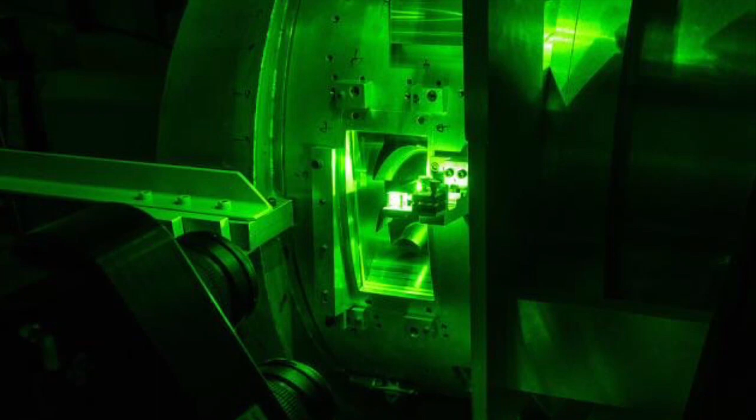I'm Nick Daggett, the propulsion engineer. At the University of Bath, the ELA, or Electric Light Aircraft team, have been designing solutions for the future of air travel since 2016. Some of our previous contributions have included an all-electric commuter aircraft with 9 seats, developing a strategy for generative design for additive manufacture, and volumetric analysis of propulsion unit egress mainstream interactions to improve efficiency.

In everything we do, sustainability comes first. Our entry into the Sustainable Aviation competition takes a deep look into the future for aerospace vehicles, theorising how we can achieve zero-emission flight within the next decade. This is the future of propulsion.

The aviation industry is increasingly becoming a leading contributor to global warming. Whilst other sectors such as energy, farming and manufacturing are making steps to reduce their greenhouse gas emissions, air travel is currently lagging behind. The industry has set targets to achieve net zero emissions by 2050, but currently it is some way from accomplishing this.

In the last 5 years, battery electric vehicles have emerged as the focus of aviation's attempt to decarbonise. Rolls-Royce and Airbus have exhibited plans for their regional eFan-X in 2017, but this was later scrapped. Meanwhile, others have attempted to design larger electric aircraft or have made proposals for electrification of urban air mobility. But as of today, no electric aircraft operate commercially.

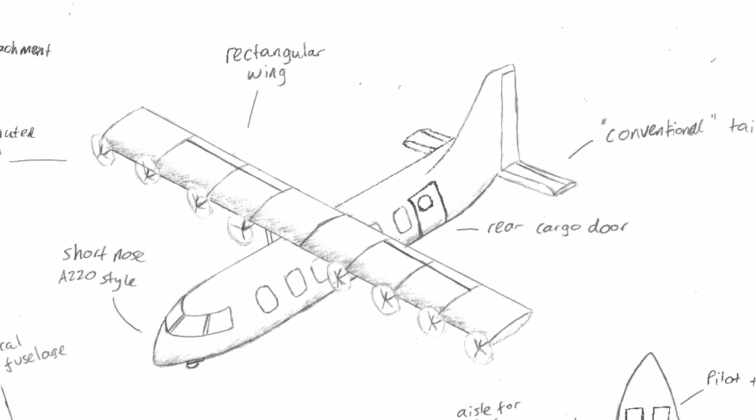As we have found in some of our previous design work, whilst all electric aircraft can operate with zero emissions, their low energy density because of the batteries compared to traditional aircraft fuel means that they are inherently heavy, which severely limits the range that they can achieve. But what if the requirements to incorporate a heavy battery into aircraft could be mitigated by making other parts of the aircraft lighter? Individually, we have developed some concept ideas for methods which may be able to achieve this.

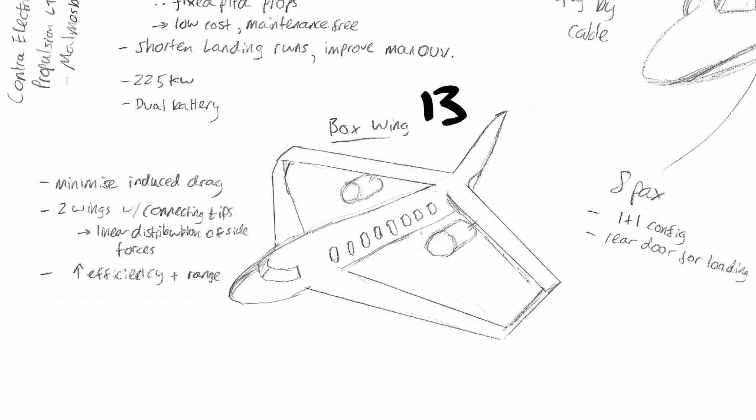While ideas such as lighter structural materials and more power-dense propulsion units are actively being considered by the industry today, our concepts envisioned a future where increasing the efficiency of the airframe would radically reduce the weight of the aircraft. Traditional tube and wing aircraft such as the Airbus A320 exhibit a maximum lift-to-drag ratio of around 18.

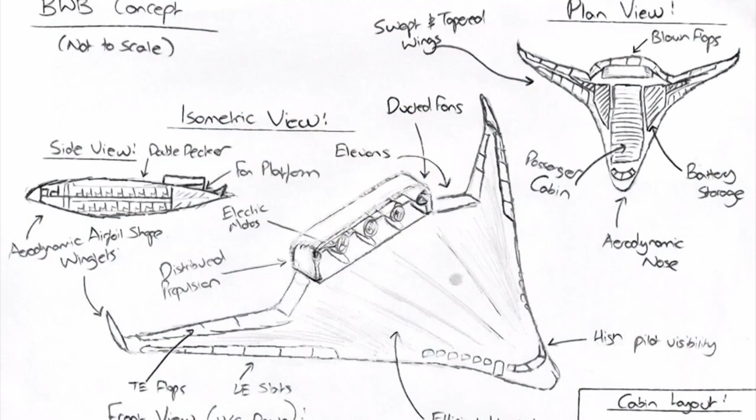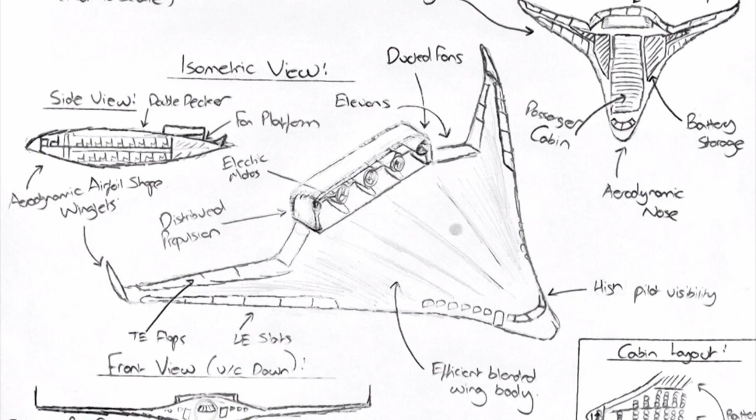Our most aerodynamically efficient concept, a blended wing body aircraft or BWB, would exhibit a lift-to-drag ratio of up to 25. Therefore, a BWB would provide a greater lifting capacity than similar-sized tube and wing aircraft, which could be used to carry a larger battery pack. This is the concept we decided to take forward.

During concept selection, we also disregarded ideas based on more radical zero-emission solutions like hydrogen or lighter-than-air technology, since the groundwork for battery electric flight has already been laid by the automotive industry and aerospace players in the last 5 years. We believe battery power is the future of propulsion.

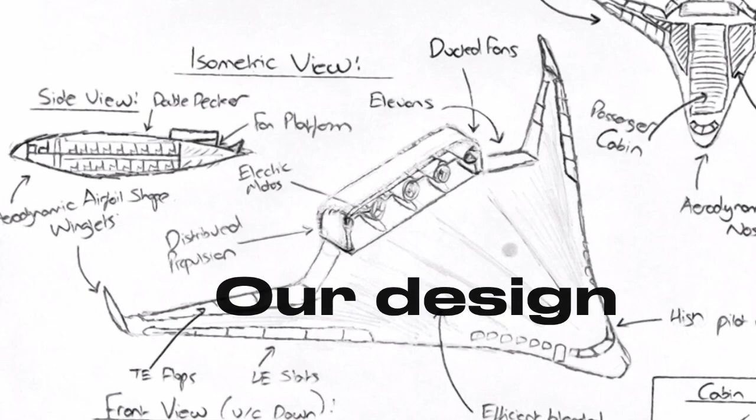From the concept designs, we decided to use distributed ducted fans for their high propulsive efficiency and effectiveness when integrated with a blended wing body design. This is due to their ability to provide a blown elevon effect, where the ducted fans act to re-energize the boundary layer at the elevons and enable greater aerodynamic performance.

This allows higher angles of attack before reaching the stall condition of the aerofoil, thus allowing for short takeoff and landing capability. To materialize the concepts into a CAD model, I used SolidWorks xDesign.

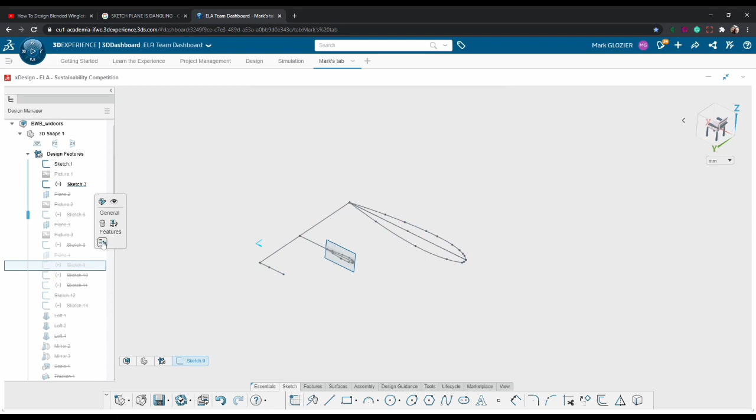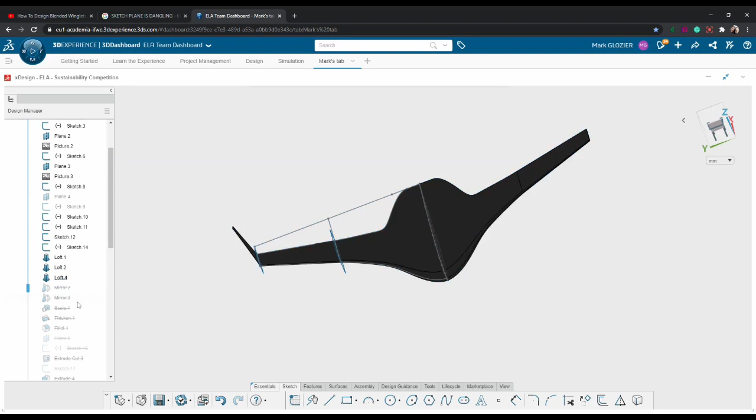I started by sketching the overall plan profile of the BWB and sketching aerofoil profiles to fit within this. NACA 23012 aerofoils were chosen from research as a suitable section for the BWB. The profile was imported into X-Design as an image and sketched over as a spline profile. These profiles were lofted with guide curves from the plan view to form the BWB and wingtips.

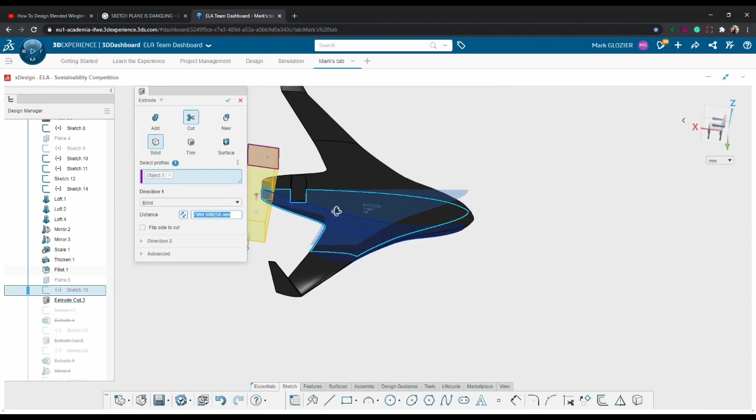The mounts for the ducted fans were then modelled through an extrusion and the fans assembled accordingly. Elevons were then modelled and assembled into the model upon performing extrusion cuts and modelling the shafts. The ducted fans themselves were modelled in xDesign and assembled within the ducted fan unit within CATIA.

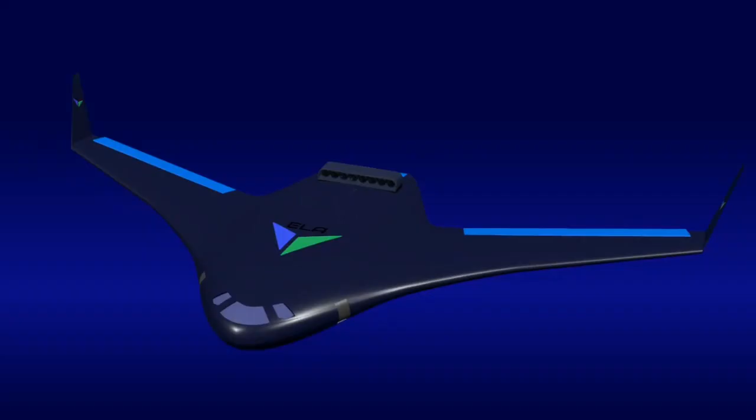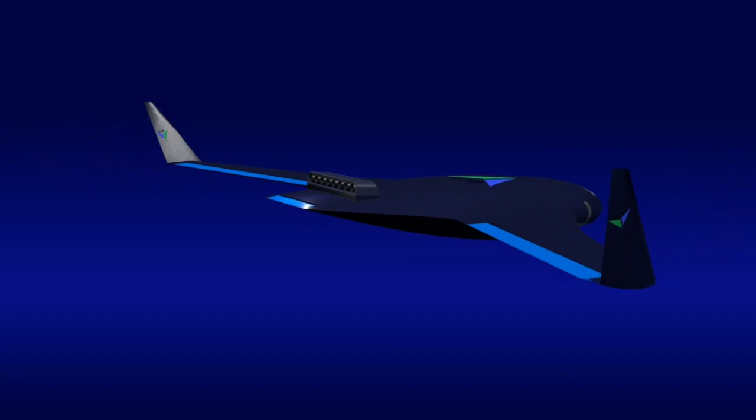This is our final aircraft design, featuring a frontal passenger cabin, ducted fans, winglets and elevons. We created this render on the 3D Experience platform in CATIA Live Rendering, setting up lights and a camera path, and using it to add the ELA decal.

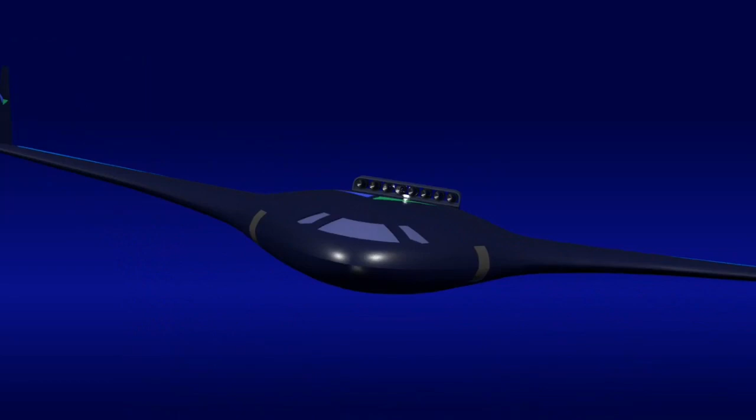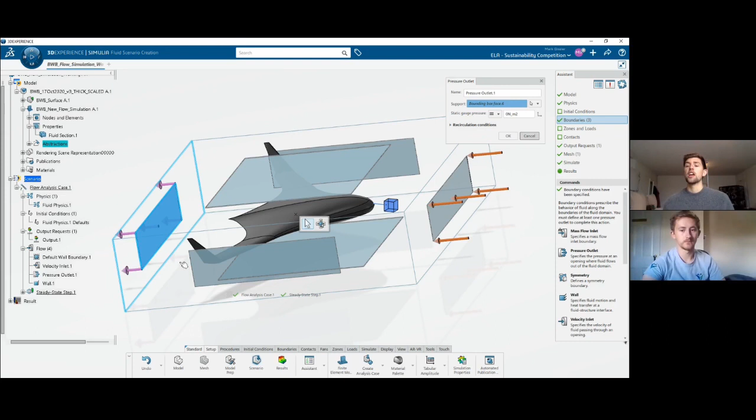The next step was to subject our designs to some validation simulations. We wanted to simulate the flow of fluid over the blended wing body to show off the efficiency of the body. The first step was to import the model and assign the fluid region, which we did by creating a bounding box where the fluid would be and assigning the model as the fluid cavity. Then we assigned our boundary and initial conditions: an inlet velocity condition, an outlet zero pressure condition, and the walls of the bounding box as the simulation walls with a slip condition.

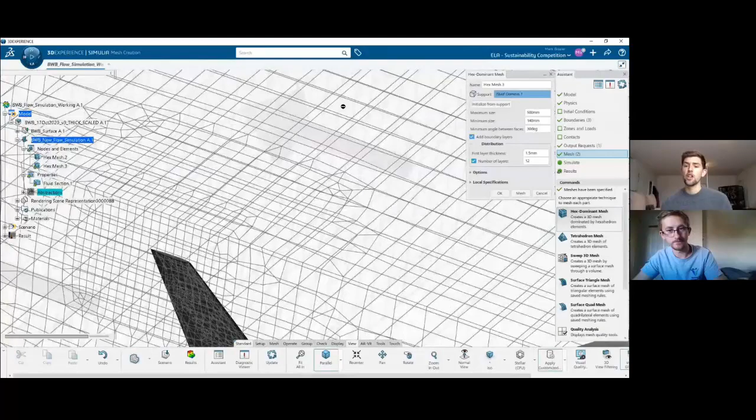The next step was to assign the fluid as air and create our output requests, so the simulation would record the data we later wanted to use to create plots and figures. Before we could run an accurate simulation, we had to create a refined mesh. We did this using the hex dominant mesh settings within Simulia, and also using boundary layer conditions to ensure refined mesh at the edges to show the change in the boundary layer state.

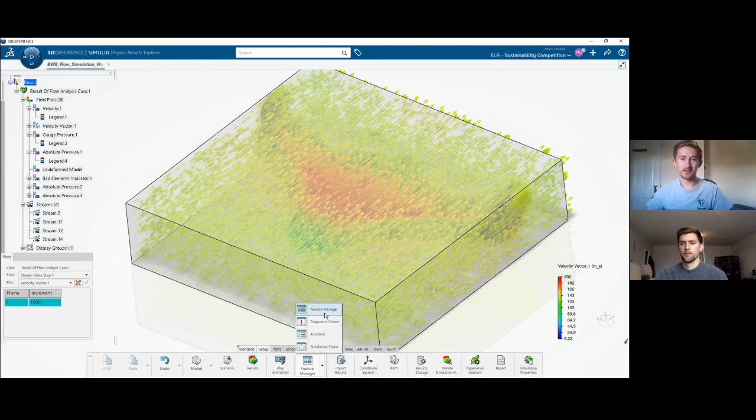We obtained the velocity fields from the CFD simulations and analysed the flow field around the blended wing body at different sections across the wing. By changing the domain to the blended wing body surface, we were able to obtain the general absolute pressure field across the surface. We analysed pressure contours at different spans across the blended wing body and extracted numerical values for the pressure across the aerofoil.

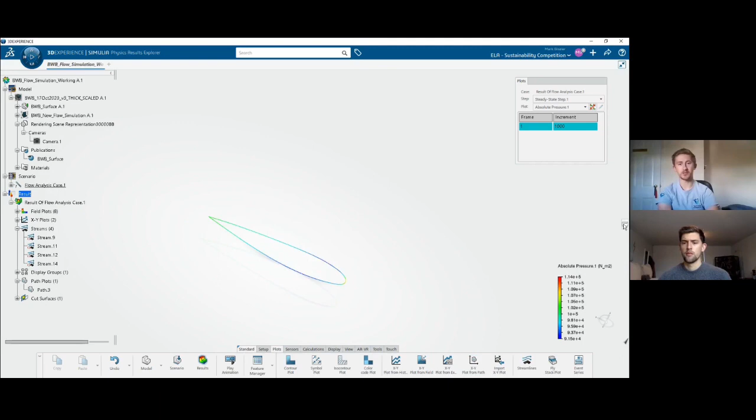We plotted an XY path across the section of the aerofoil to obtain the pressures on the suction and pressure side. The next step was to add to the simulation by plotting velocity streamlines, and using the 3D Experience play button it was possible to easily animate the flow over the surface of the aircraft, as you can see in this video. We decided to show off this feature using the side view, the top view and an isometric view to give a feel of how the flow passes over the aircraft body and generates lift.

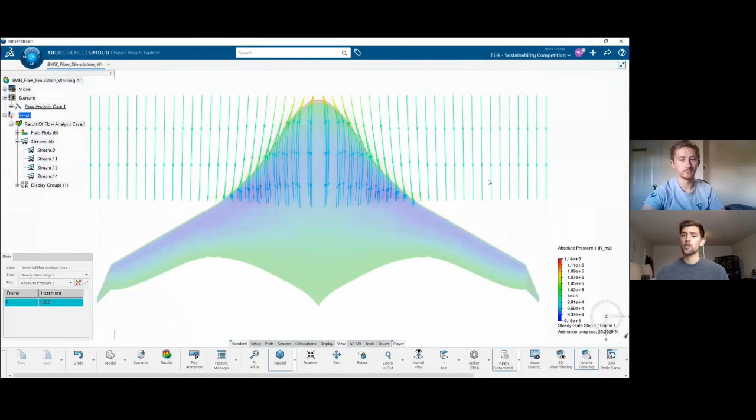From a historical XY plot of the different components of force, we obtained the drag and lift force as the solution came to convergence. These results, combined with those discussed previously, showed that the blended wing body wings and elevons must be mounted at a permanent angle in order to generate sufficient lift.

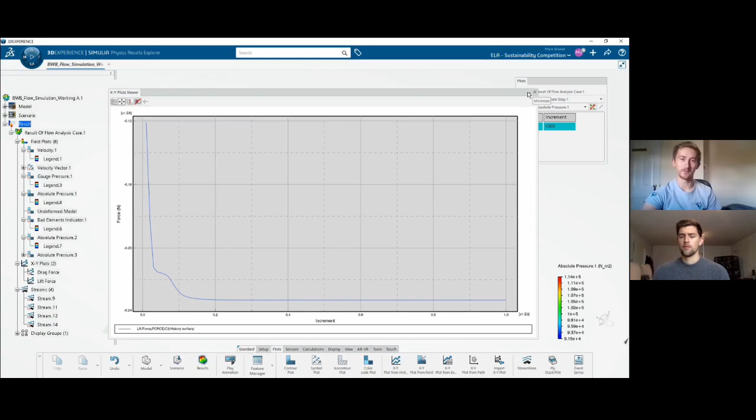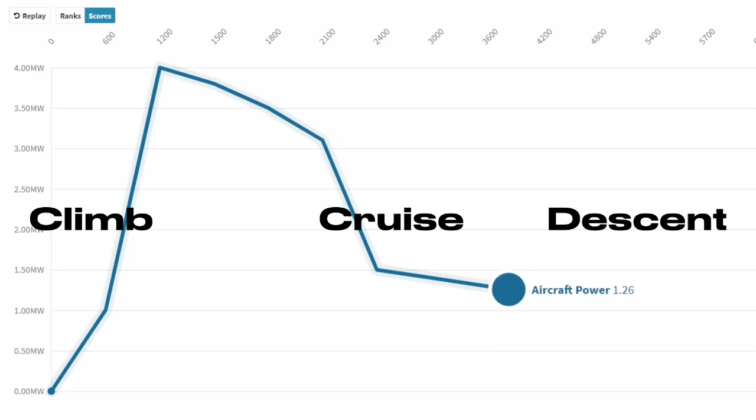Our initial calculations showed that despite the advancements of the BWB structure, the low energy density battery technology would still limit our aircraft to operating on shorter regional routes. In an attempt to improve range, we built an analytical model of the power requirements for a typical regional aircraft flight. This power profile helped us identify that the takeoff and climb phases require significantly more power than the rest of the flight.

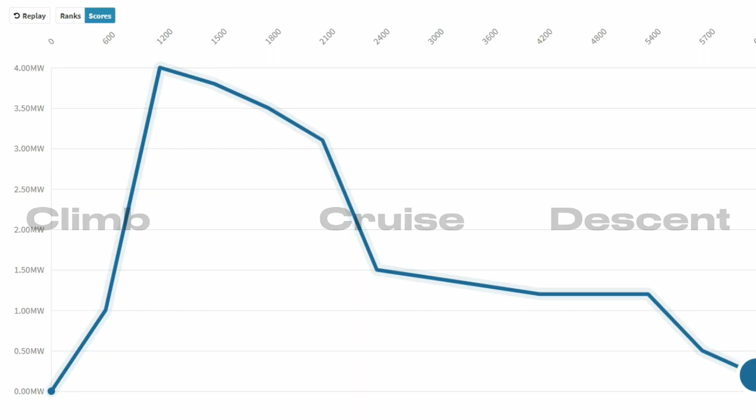In order to give battery-powered flight the leg up it needs to reach the range required to service profitable regional routes, we decided to incorporate a beamed power solution. Beamed power refers to supplying power to the aircraft via electromagnetic radiation from a grounded source, reducing the need for the aircraft to carry its own stored energy in the form of batteries or fuel.

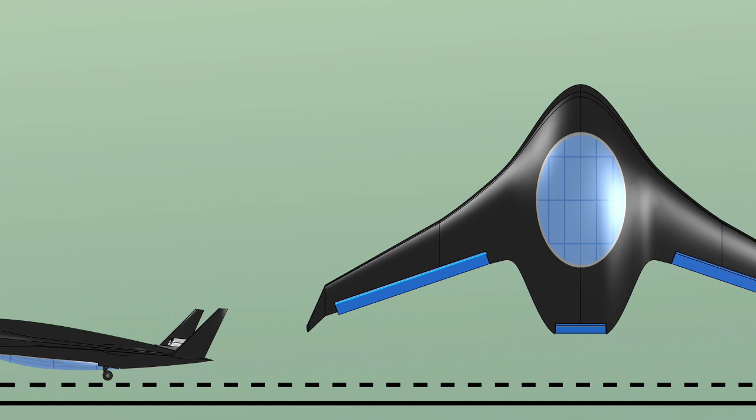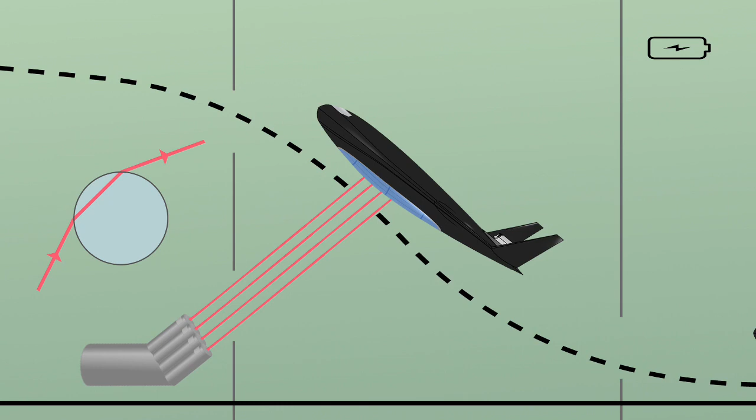While relying on beamed power for the whole flight would be unreasonable due to infrastructure requirements, providing beamed power during takeoff and climb phases would significantly increase the range of the aircraft by matching power drain during this time. A laser array would track photovoltaic cells on the underside of the aircraft, with a combination of laser and photovoltaic chemistry chosen to match wavelengths for maximum conversion efficiency. A relatively brief time for the laser power transfer would mean that cooling would be a less serious issue than for an entirely laser-powered flight, as heat could be dissipated during the later phases of the flight.

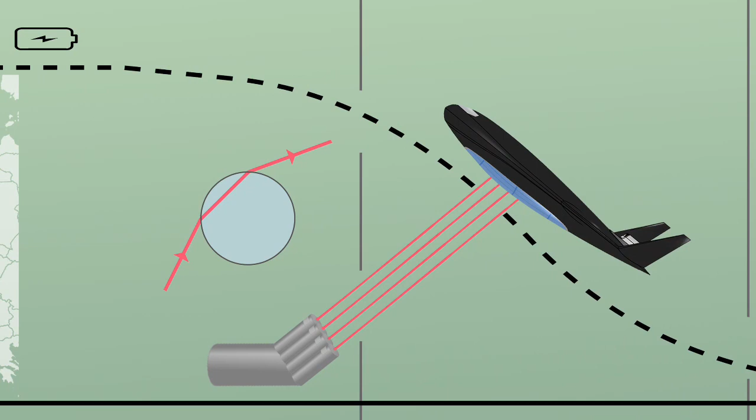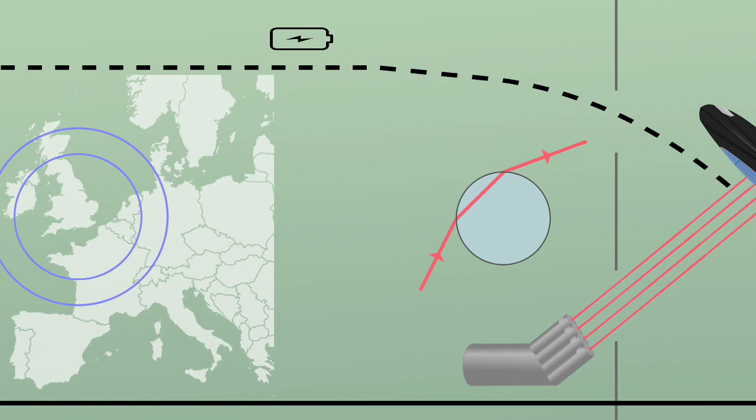This use of beamed power would help to improve the capabilities of battery-powered flight by reducing the reliance on battery energy density, which presently restricts electric aircraft to very short-range services. With this improved range, electric aircraft could replace those reliant on fossil fuels, flying higher passenger numbers on regional flights, and do this earlier than would be possible relying solely on battery energy density improvements.

The management of our entry into the sustainable aviation competition was made simple and effective through use of the 3D Experience tools. We set up a project management tab on our team dashboard and used different apps to assist us in managing the project. Web Notes was useful for recording our meeting minutes from our daily morning and afternoon meetings on Discord. We were also able to record our goals for each day in these notes, so all team members knew what needed to be done next.

This tab also included a quick link to our collaborative space and a 3D drive which we used to share documents we put together on research in different areas, as well as sharing screen recordings for the final video presentation.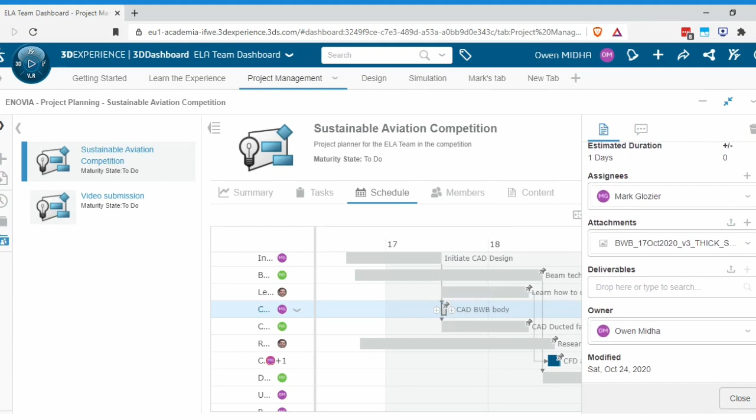The most useful tool, however, was ENOVIA Project Planner. We used this to build a Gantt chart of the tasks we need to accomplish to deliver the project goals. It was especially useful to assign these tasks to each team member. We also assigned a priority and put in dependencies for each of the tasks. We used the deliverables and attachments feature to easily navigate to the output from the task. The summary tab gave us a good overview of our progress throughout the project, while the task tab was useful as a current to-do list.

When selecting materials to manufacture the aircraft, we wanted to achieve a lightweight solution with high strength, stiffness and damage tolerance, but also use materials that are inexpensive where possible. We considered the manufacturability, selecting suitable materials for parts that need to be 3D printed or machined.

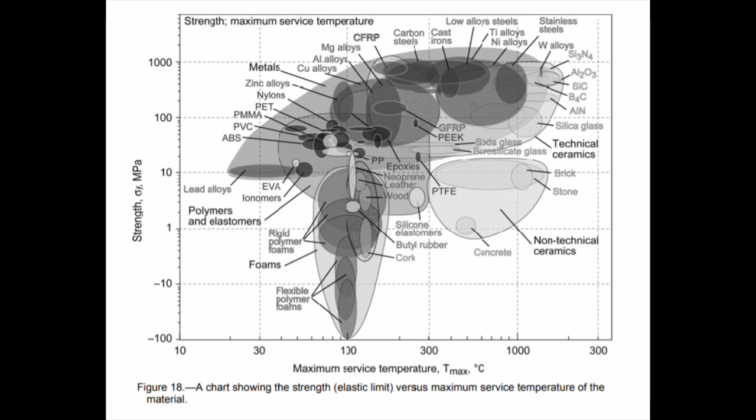Reviewing the properties of common aerospace materials such as aluminium alloys, titanium alloys, ceramics and hybrid composites, we decided on a carbon and glass fibre reinforced plastic structure to enable us to design for a high structural safety factor whilst minimising weight. For certain heat sensitive areas on the aircraft, particularly surrounding the PV cells, titanium alloys will be used due to their high heat resistance, as shown by the Ashby charts which we analysed.

Our aftermarket considerations will maximise the number of components that can either be reused, recycled, or remanufactured at the end of the aircraft's life. To be reused, all parts will need to be awarded a certificate of airworthiness, so it's therefore important that thorough maintenance is carried out throughout the aircraft's life to keep parts in prime working conditions.

Typically, a metallic aircraft component can be recycled by up to 90% of its mass. However, our aircraft will be built primarily with CFRP composites in order to minimise weight. Composite components can be difficult to recycle. There are several ways to recycle composites now that we have been researching, though they are still developing and scaling up commercially. These include nitric acid treatment to dissolve the thermoset resins and incineration processes.

Another sustainability challenge involved with our design is the end-of-life recycling of our batteries. One suggestion is to sell on degraded batteries to ground-based industries who can accept a lower energy density rating.

To preserve the quality of our aircraft components throughout its life, we will repair components where possible using advanced manufacturing techniques, further improving its sustainability. For example, directed energy deposition will be utilised to repair fan blades on the ducted fans if they become damaged during, for example, a bird strike. This is very important for our design given the increased number of fans in the distributed propulsion system.